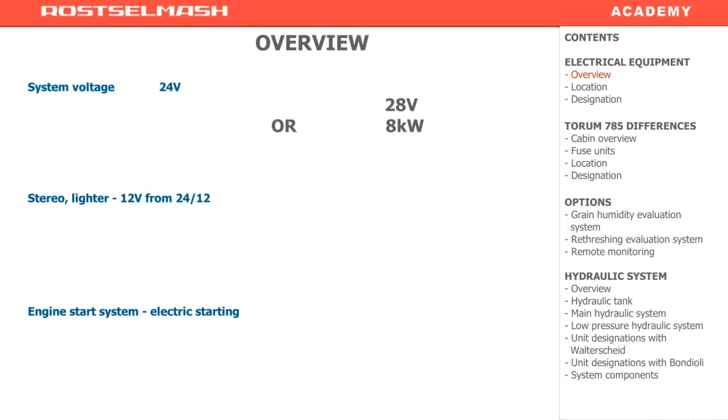Harvester electrical equipment. The voltage of the onboard circuit is 24 volts. It is achieved by installing two rechargeable batteries of 12 volts each, and due to serial connection, the voltage of the onboard circuit is 24 volts. There is also a generator. When the engine is running, it supplies power to the onboard circuit and also charges batteries.

When the engine is off, the power of both batteries is used. You may use the voltage of 12 volts on the harvester onboard circuit. For this purpose, a special 24 to 12 volts converter is installed. The startup system of the harvester is an electric starter one. Please observe the following safety measures when working with electrical equipment of the harvester.

The most important thing is not to disconnect the batteries when the engine is working. In this case, when the batteries are disconnected, the impulses will come from the generator. Such negligence may lead to power surges that will damage the electrical equipment.

Next, before welding, first remove the plus terminal. The right thing to do would be to remove both terminals, plus and minus, then apply both terminals together. Both batteries are disconnected. A really important thing here is to put the engine switch into the on position. When it's switched off, the circuit is broken.

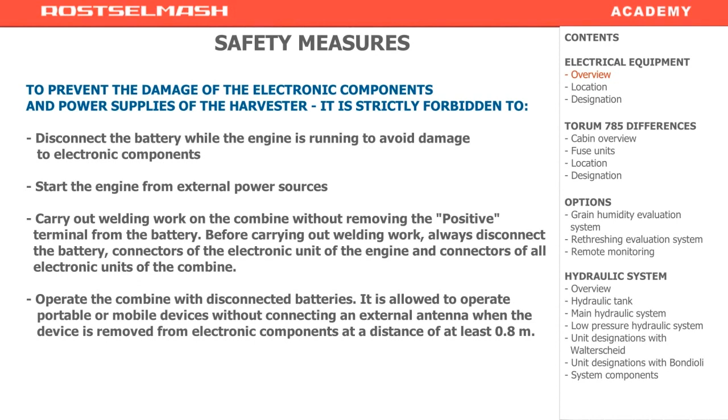Another important moment when welding. Place the ground in the vicinity of the welding spot. Otherwise, the welding process will create impulses that will make a negative impact on the harvester electronics.

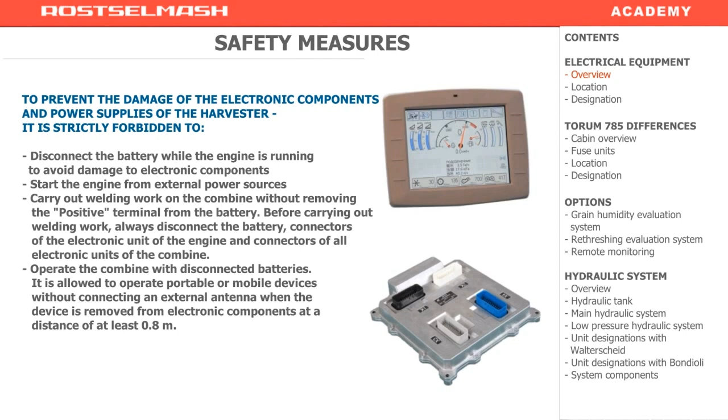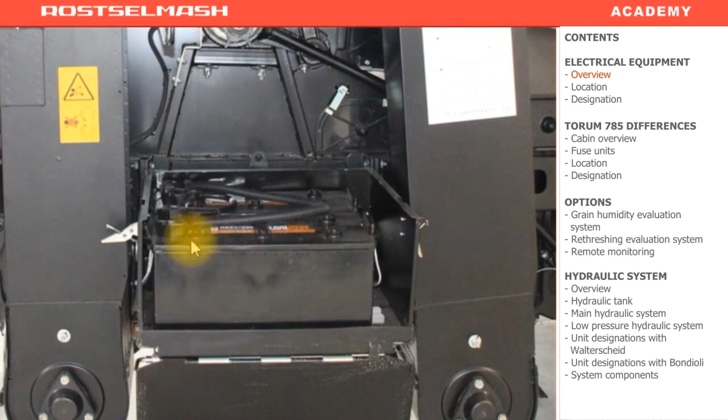The batteries are located on the right side of the harvester in the special battery box. As has been mentioned before, there are two of them. Below, under the lid, there is a power switch. It switches off the plus terminal. Some people call it a ground switch, but it would be wrong to call it this way. These days, the ground is screwed directly to the body of the harvester, and the plus terminal is disabled with a power switch.

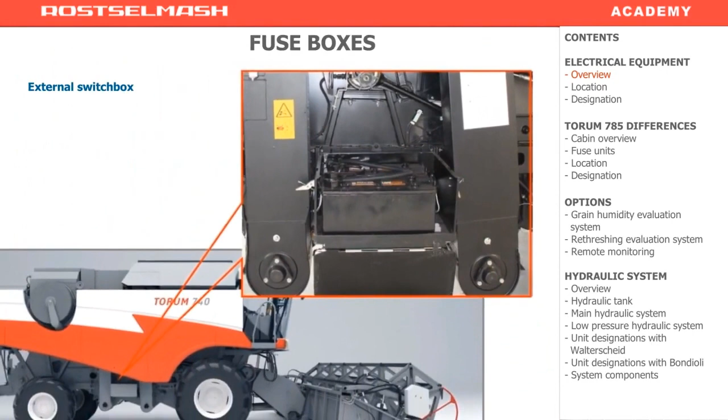Under the battery box, there are three power fuses. 30 amperes is the power supply to the engine control unit. 80 amperes is the onboard circuit power supply. If one of the fuses blows, half of the combine is de-energized. If both of them blow, the whole combine is de-energized. From those fuses, the power comes via thick wires, which go into the external switch box on the right.

Here you can see two power blocks. Each of them contains two fuses. The fuses on the top are 60 amperes. The ones at the bottom are 30 amperes. Above the power blocks, there are two conventional fuse boxes, FU7, FU6, where the fuses of consuming units are located. Vertically positioned fuses are the spare ones. You use them to change the blown fuses.

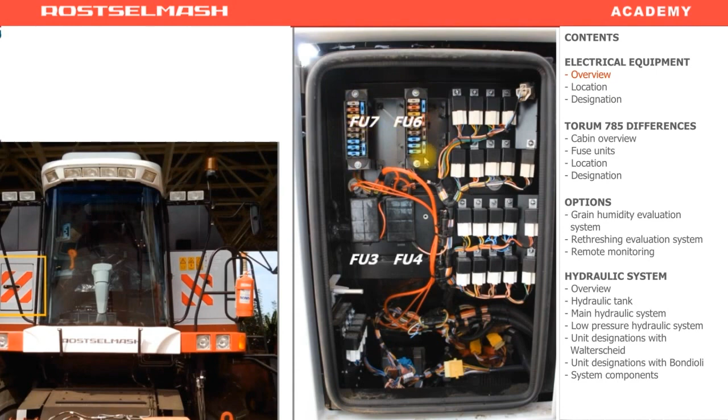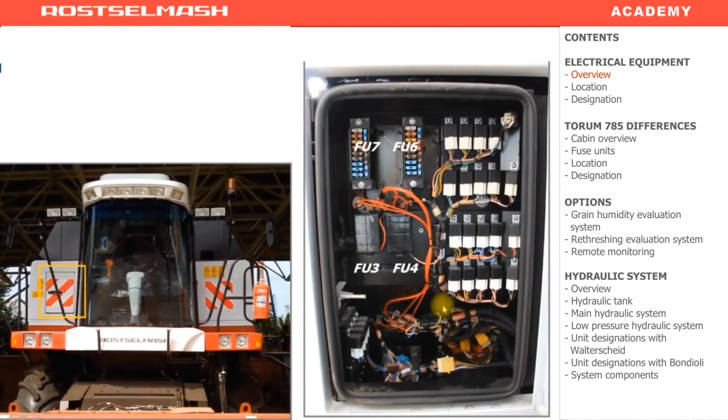Also, this box contains a pretty big amount of relays. It also contains various electrical wiring, harnesses, and connectors. Then there is a small cabin switch box. It is located on the right. If you open the right door, unscrew the iron shield, and dismantle it, you will see two small rows of relays.

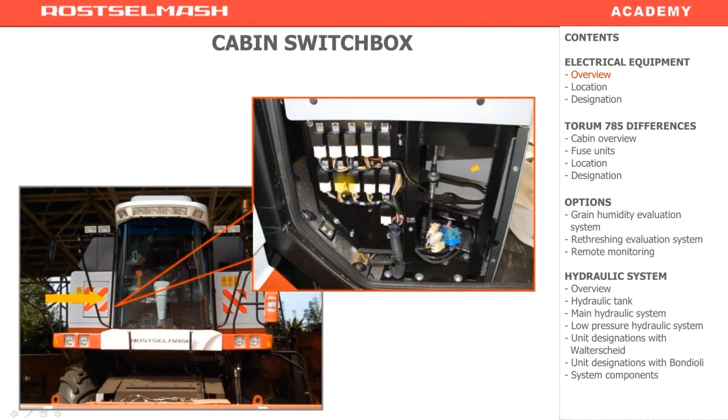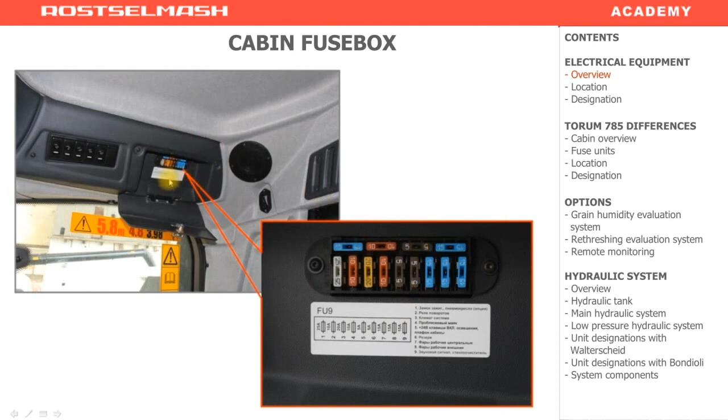Another fuse box is located in the cabin at the top. On the right you will also see the designations of the fuses. The designations of other fuses and relays can be found on the door of the switch box inside.

It is prohibited to use fuses with a value higher than installed here. If a 5 ampere fuse blows, it is prohibited to replace it with a 10 or 15 ampere fuse. An even worse solution would be to use copper wire coils or a coin or a paper clip instead.

Monitoring and control system has a display, a control panel, and all the other electronic units installed on the machine: a display, a control panel, 2 chassis modules, and a field copying system module.

There is also a joystick and a CAN bus, which controls the combine. We see the orange lines, which connect the electronics of the harvester with the electronic units of the engine.

The engine has 2 units of its own, produced by Mercedes. One of them is located on the engine, and the other one is located in the cab.

The units are interconnected with a CAN bus, and to control the engine and read its parameters, there is another bus between the chassis module and the engine control unit ADM2.

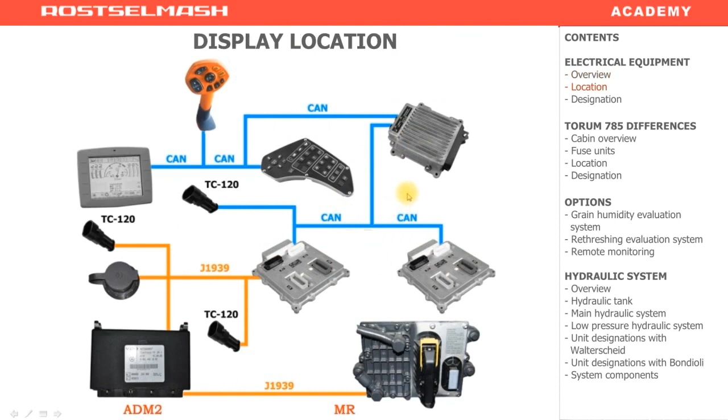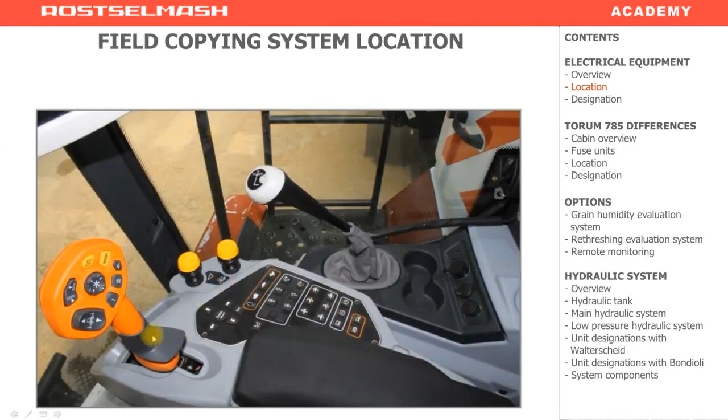The display is located inside the cab, on the front stand. The joystick and the control panel are located in the armrest. Under the cab, there is a field copying system unit.

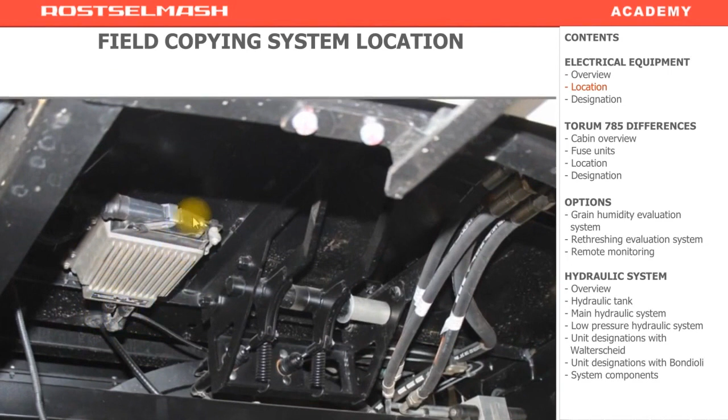Here you can see the 2 round connectors of the CAN bus, and also the 55-pin connector for inputs, outputs, sensors, coil control, and so on.

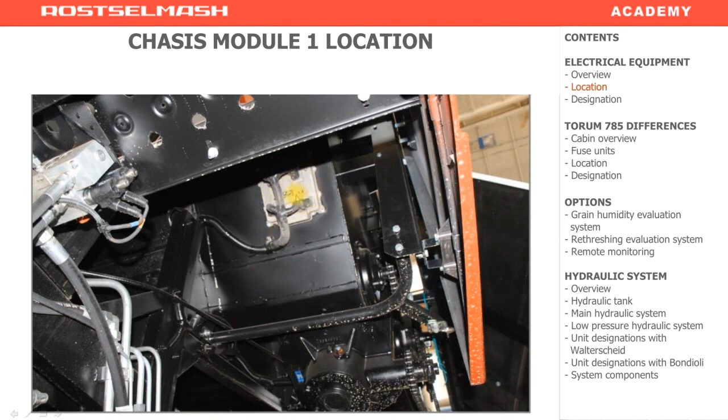The first chassis module is located on the left wall of the grain tank. Below, we have the left front wheel, and if you look up, you will see the chassis module.

The second chassis module is located on the rear wall of the grain tank, on the side of the motor unit. Here we also see TC-120, which is attached with a harness.

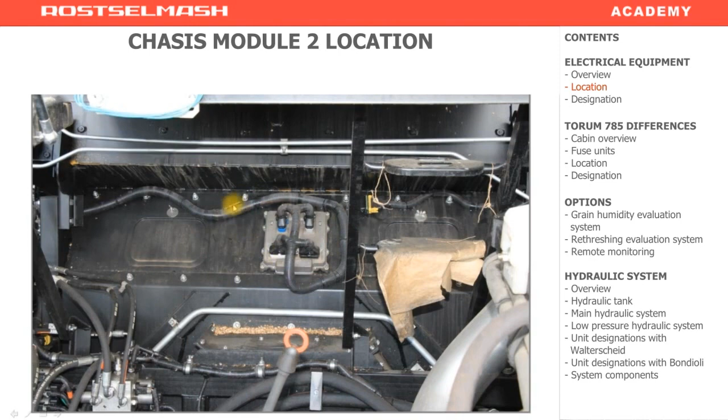The ADM2 unit is located in the cab. If you open this door by unscrewing 2 bolts...

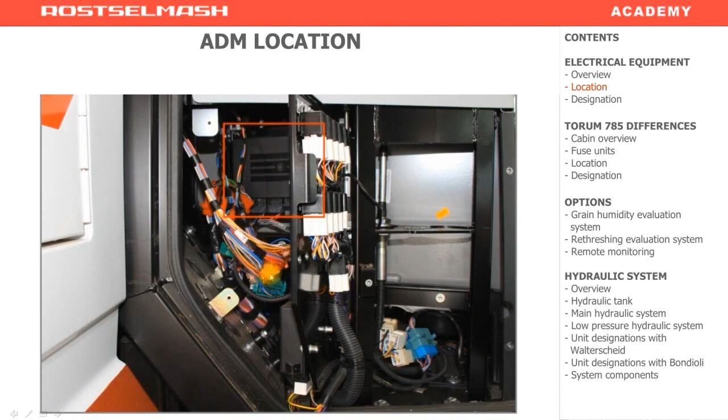...you will see the engine control module and other electrical connectors, for example harnesses and inputs. Here, swivel lights relays can be found.

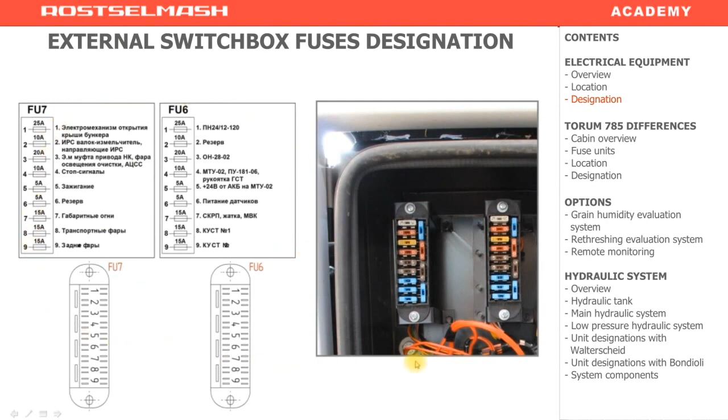For the purpose of making handouts, in this manual you will see the fuses diagram. Here you will find the designation of the fuses and switchbox relays, which can be used for searching and eliminating failures.

The differences of Torum 785: engine start blocking. Instead of blocking based on the neutral gearbox stage, here the engine start is blocked based on the neutral position of the joystick. If the joystick is not in the neutral position, the engine start is blocked.

The second blocking type is similar. The engine cannot be started repeatedly when it's already working. This prevents starter breakdown when the engine is working.

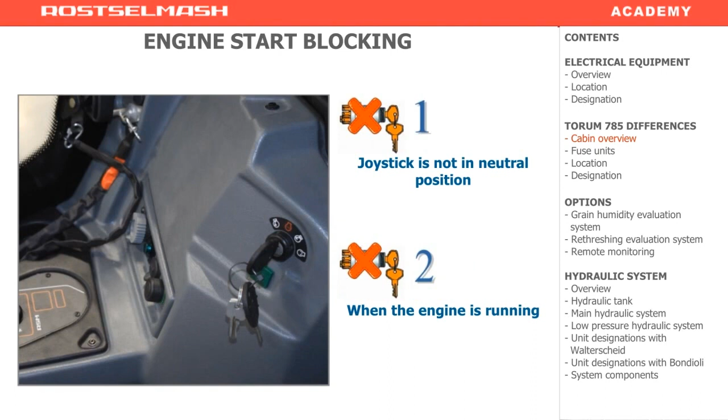The lighting here is similar: clearance lighting, indicators on the steering column. Headlights on the front bumper and on the rear bumper are different.

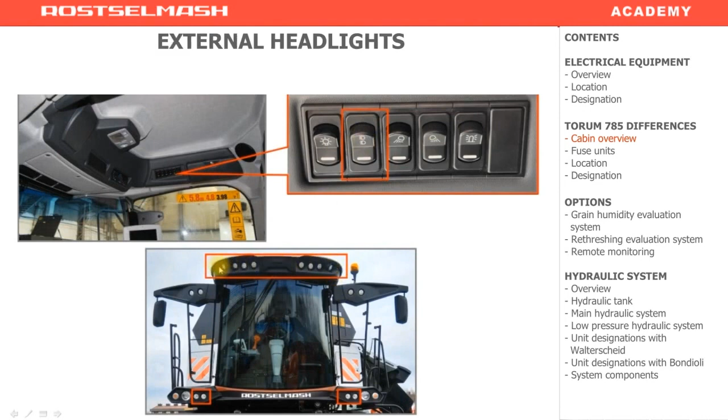The transport lighting is switched on if the clearance lighting is on. The next button switches on the central working lights, and on this model there is a bigger quantity of lights. Here you can see 8 working lights, external working lights, 2 on the left, 2 on the right.

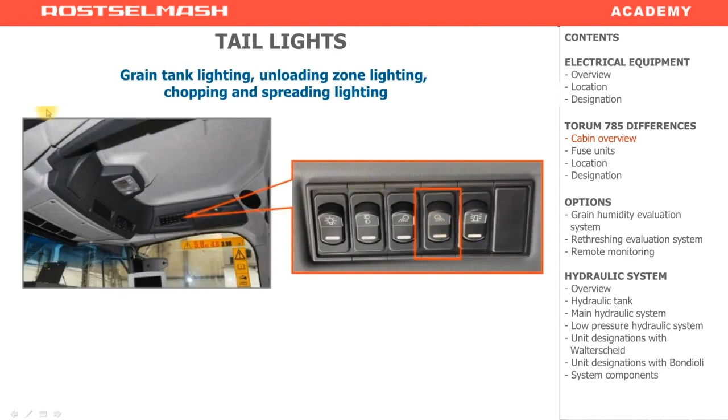The rear working lights are used for lighting the grain tank and chopping and spreading system: chopping and spreading lights, grain tank lights, and unloading zone lights.

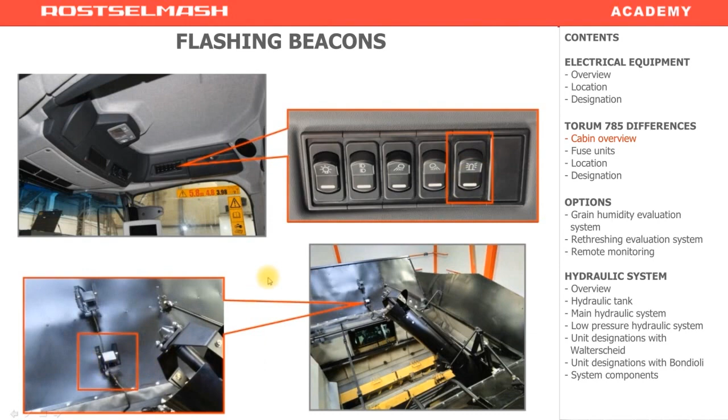Flashing beacons are identical here. You can switch the beacon on manually from the cabin using this button, and when the grain tank is 75% full, it is switched on automatically. One flashing beacon is located at the front of the harvester, and the other one is at the back.

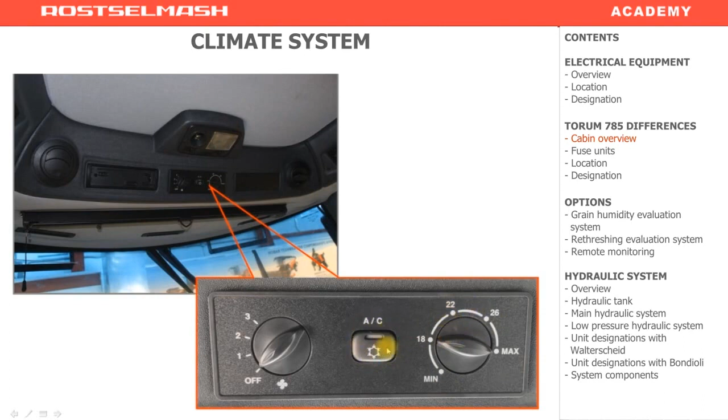The temperature indicator is located behind the driver, near the ceiling.

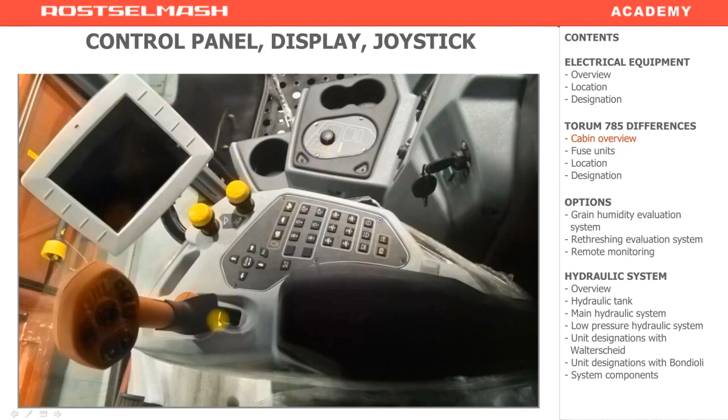The control panel is similar. The display is identical as well, but it is located on the armrest. The joystick is similar, but here we see the panel with the gearbox ranges switch.

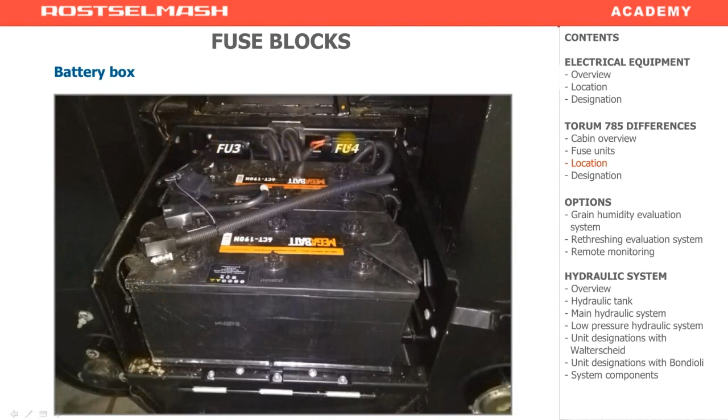The difference in the electric equipment is the following: the power fuses are located not under the battery box, but inside of it — 30 amperes and 2 of them 80 amperes, the same as on Torum 750 and 780.

The external switch box is located in the same place, but the internal distribution of the components and their location are different now. For example, we have got 4 such units. The values of each fuse are shown on a laminated sticker inside the switch box.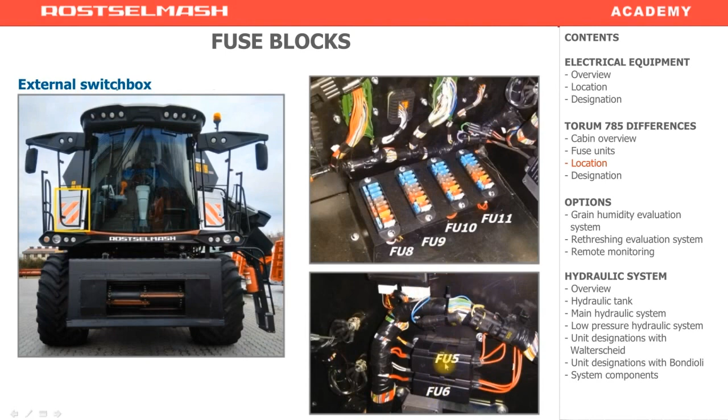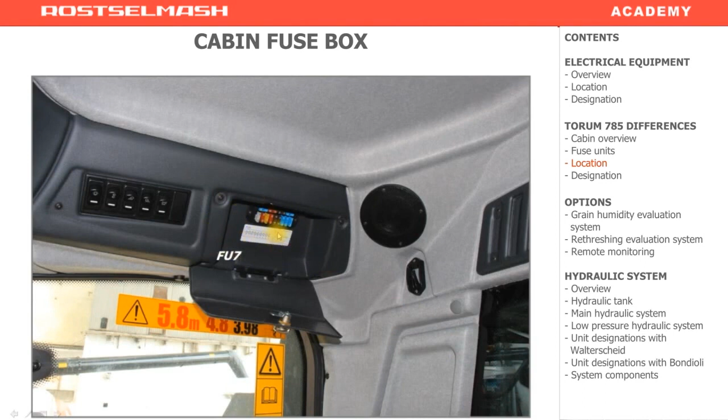There are 2 power fuses, FU5 and FU6. One more fuses unit is located inside the cab. You can find it in the same place. There is also a laminated sticker with fuse designations, which also contains their nominal values.

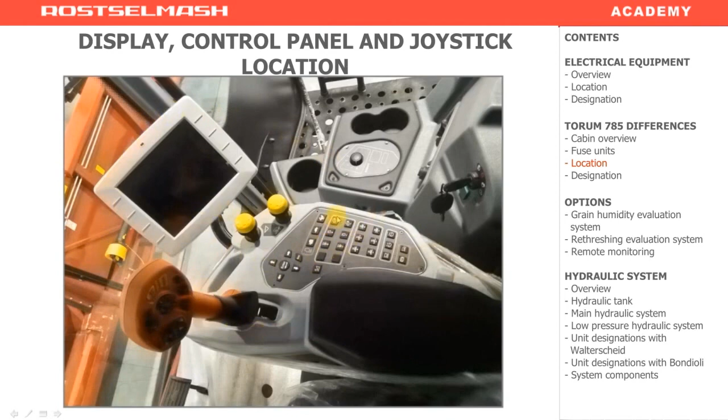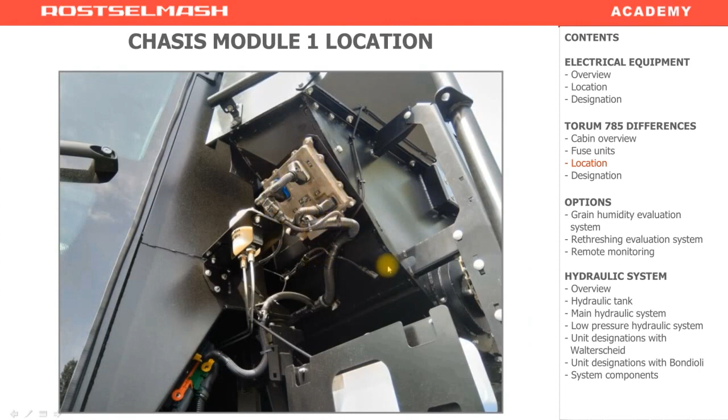As mentioned before, the display is located on the armrest. The control panel and the joystick are also here. The field copying system is under the cab in the same place. The chassis module number 1 is also located on the front wall. The chassis module number 2 is also located on the rear wall of the grain tank, but at the top, not at the bottom, as on Torum 750 and 780.

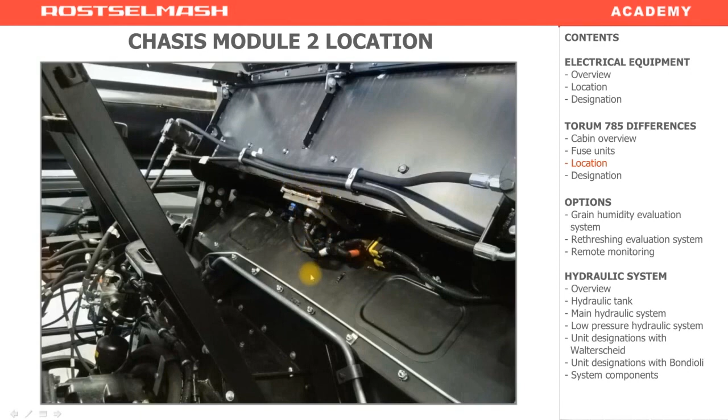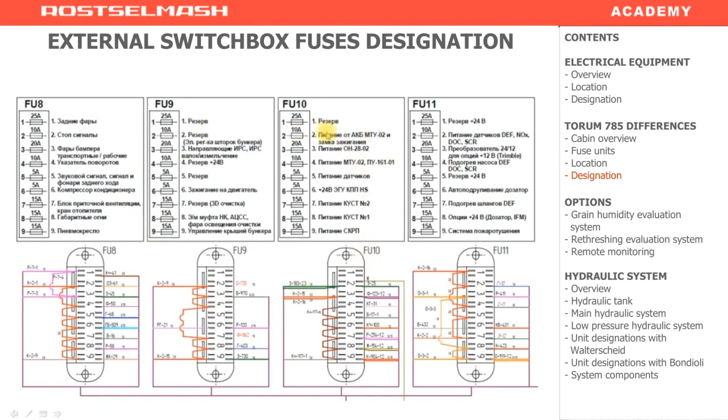For your convenience, in the handouts you'll find the values and designations of the relays and fuses located in the external switch box.

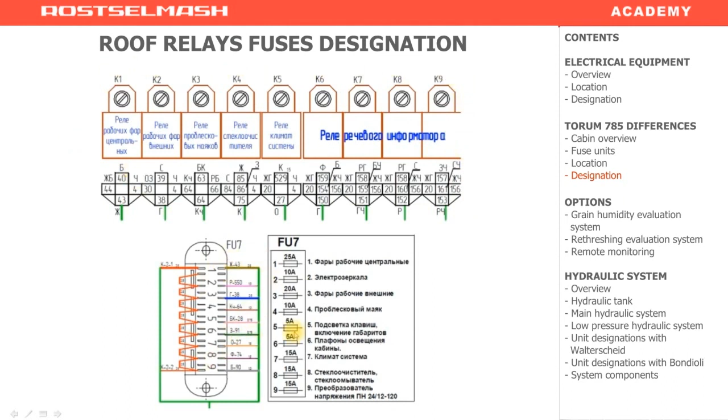This modification has got additional relays located in the roof. To access them, you have to unscrew the panel with the fuses unit, and there you can find the relays.

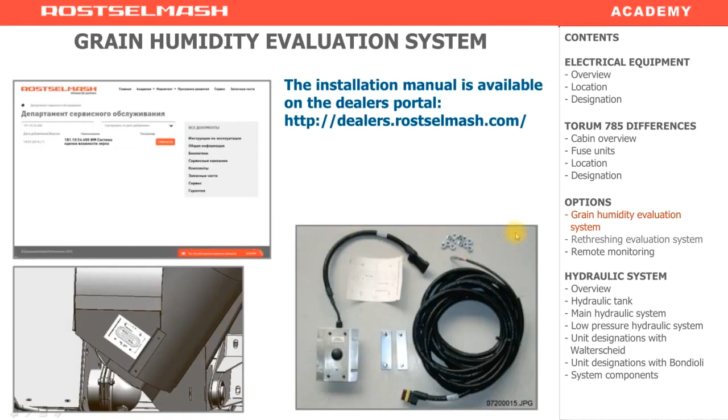Additional options: the grain humidity evaluation system. This kit can be installed as an option after you buy the harvester, so there is a possibility not to order it directly from the plant.

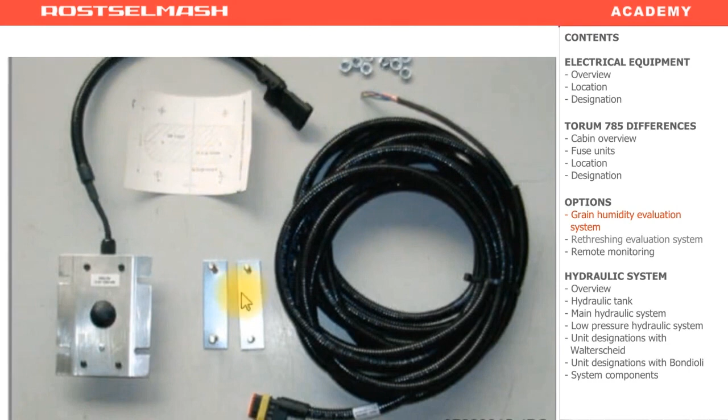We can also call it the packaged option. The parts kit contains the sensor, a cable, the sensor fitting, and an installation diagram, which is actually a sticker at the bottom of the feed auger, showing this as the place for fitting the sensor. In this spot, you cut a hole to place the sensor inside the grain tank. Install the sensor here and then calibrate and adjust it.

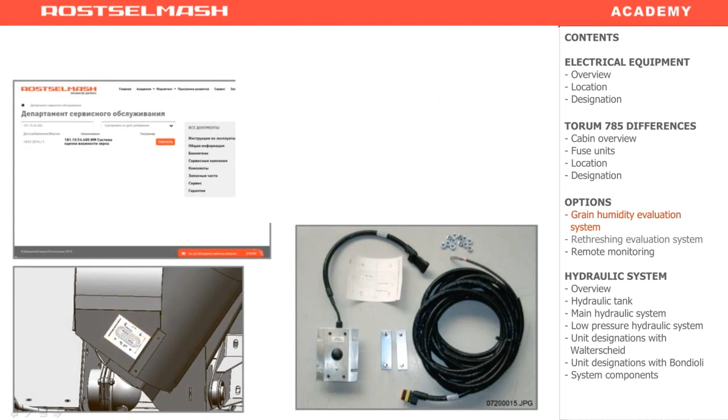The installation instructions manual can be found on a special dealer's portal, which each dealership member must have access to. As a result, on the display you will see not only the humidity level of the grain, but also its temperature.

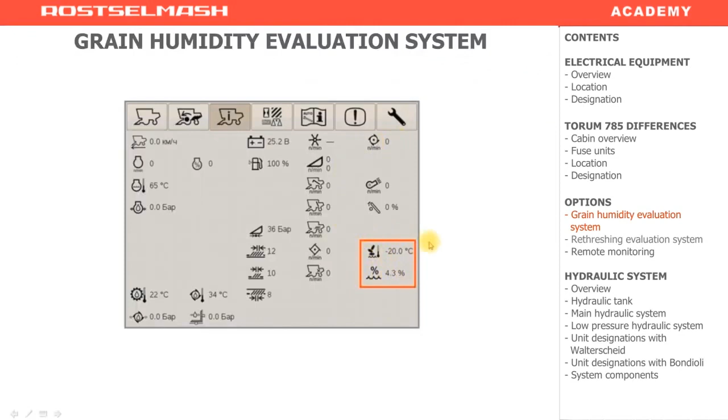The rethreshing evaluation system's installation manual is also found on the dealership portal. It is also a package solution, so it can be installed on a harvester after you buy it. It is installed here and has the form of optical sensors.

You have to store the 0 value, which indicates the absence of grain in the rethresher. This option also allows us to adjust the cleaning system of the combine more precisely. Based on the rethresher load, you can identify...

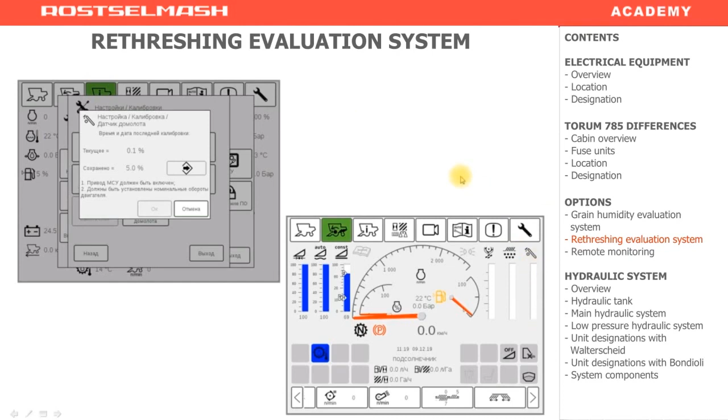On the display, you can see the third column, which is filled in a similar way as the columns showing losses. It is filled depending on the load of the tailings auger.

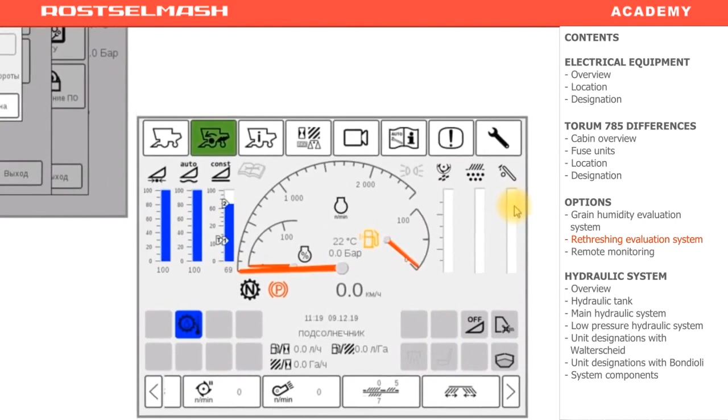Remote monitoring is the option which all Torum's models are equipped with. For this, you install the antenna, GPS and GSM modules, and connect them with cables. On the side of the module, there are slots for an SD card and a SIM card.

The SIM card is necessary for data transfer, and the SD card is necessary for storing data when there is no satellite connection. The antenna, the SD card and the SIM card must be sealed. For this, the kit contains special sealing stickers. After this, you have to transfer the number and the system number of the device, which is used for remote monitoring. This data is transferred to the plant.

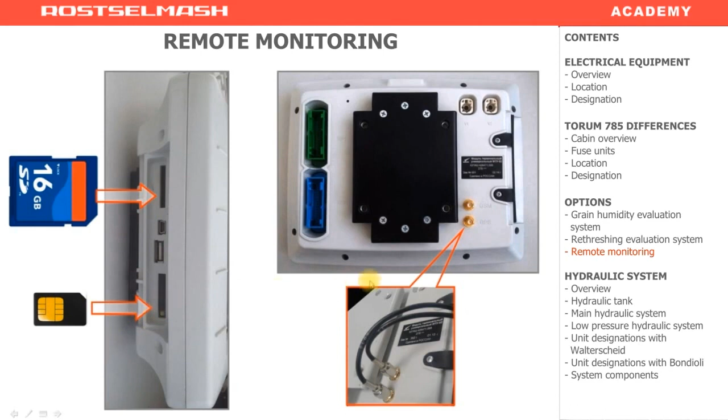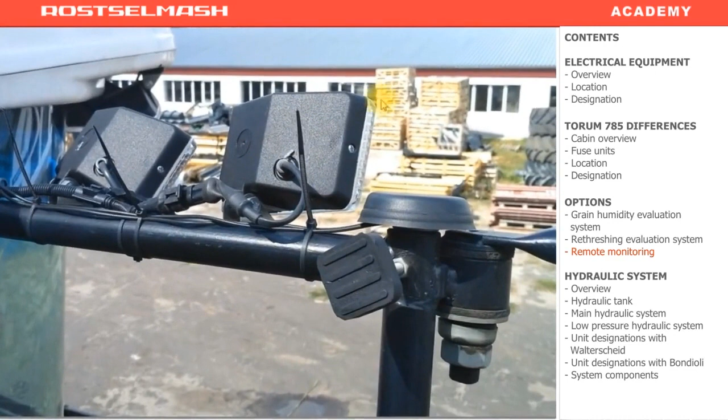As an example, you see the antenna installed on the Torum. You install it on the right, on the frame for the fitting mirrors. This type of antenna installation is correct.

If you install the antenna yourself, never put the cables inside through the weather strip. Do not press the cables with the weather strip, and do not coil the rest of the cable on the holder. You can put the cables inside through the special holes in the roof, and then connect them to the display.

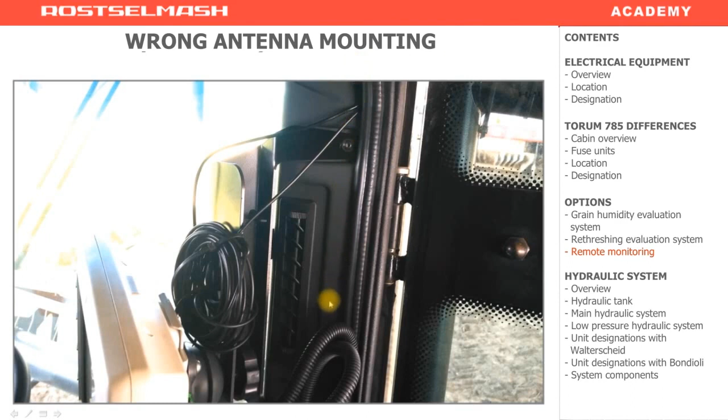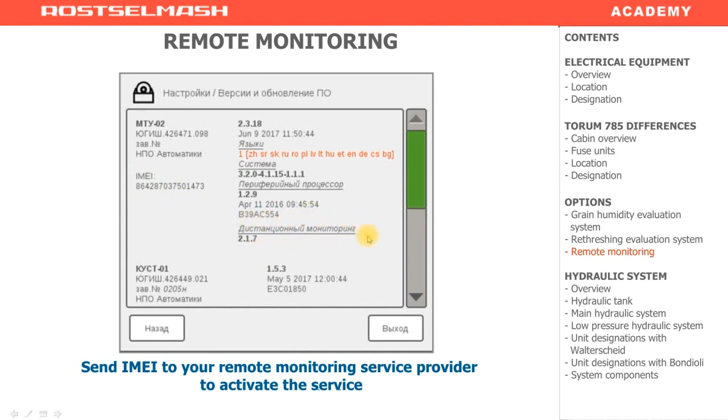The last additional option is actually an additional function to the previous option. This additional function allows you not only to see the location of the harvester, but also monitor its fuel level. You can control the fuel consumption, the number of tank refills, and other parameters, and you can see all of that in the form of graphs.

For this you install the sensor Escort TD500. It is calibrated to the tank volume. A special user manual is available for this calibration. After calibrating, you connect it to the system, and from it there is a standard system indicator that shows how much fuel you've got in the tank right now.

This data is transferred to the server, and the user is able to control it using his mobile device, a laptop or a desktop.

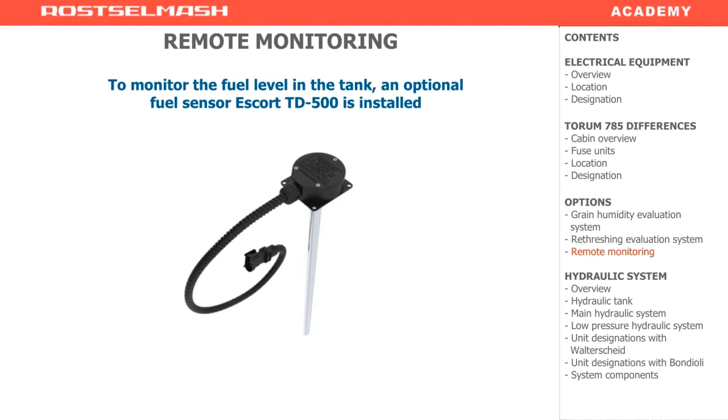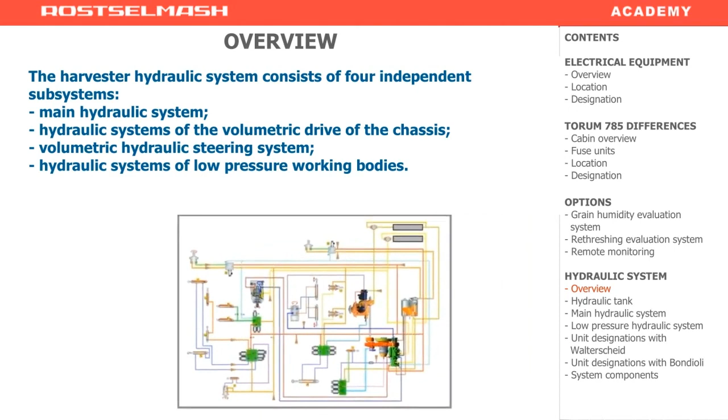Here are the main specifications. The oil type has been mentioned in the maintenance videos. The volume is 133 liters, including the hydro tank, which is 50 liters.

The main pressure specifications: the main hydro system is 160 bar, low pressure system is 28 bar, and steering system is 160. In the drive axle hydro system it's 420, and rotor drive 420. Hydrostatic transmission produced by Sauer Danfoss.

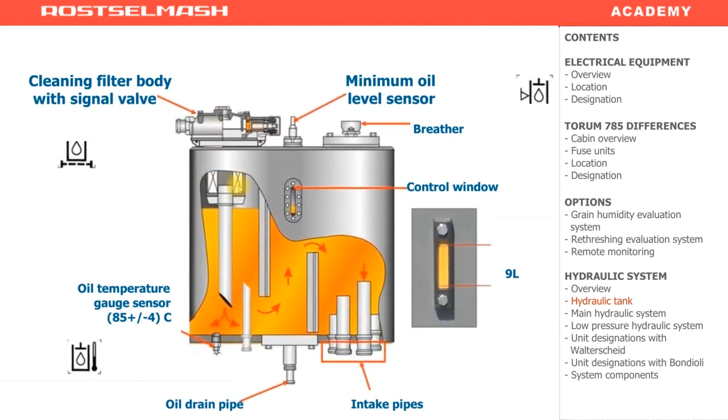Hydro tank and its components. In the top left part, there is a filter housing with a filtering element. It's the drainage line. All the drainage goes through the filtering element, and when it's cleaned, it goes into the tank. Here there's also a bypass valve.

It is equipped with a signaling sensor, which goes off in case of filter clogging. This may happen in two cases: when the filter is actually clogged, or when the oil is not heated enough. It has a high viscosity level, and it bypasses the oil filter.

Then there's the minimum oil level sensor. It notifies the driver that the oil level in the tank is low. On the right there is a breather that provides the atmosphere connection, and an inspection window that helps us control the current level of oil.

Below you can see oil intake tubes. Using special hoses, you connect the pumps, and this way the oil is pumped out of the hydro tank. On the lowest level, there is an oil intake for the steering hydro system. It is located below, because the steering hydro system is considered the most important one in the harvester.

In the middle, there is an oil drain hose. It's got a special pipe that goes to a valve, used for changing oil. Below, there is an emergency oil temperature sensor in the hydro tank. Inside the tank, we have special plates, installed to prevent oil foaming.

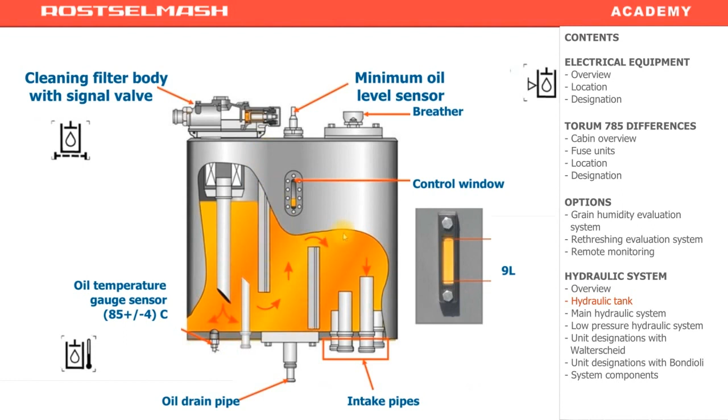The main hydraulic system contains the axial piston pump, located on the engine power reduction gear. You can see it in the first position on the left side of the harvester.

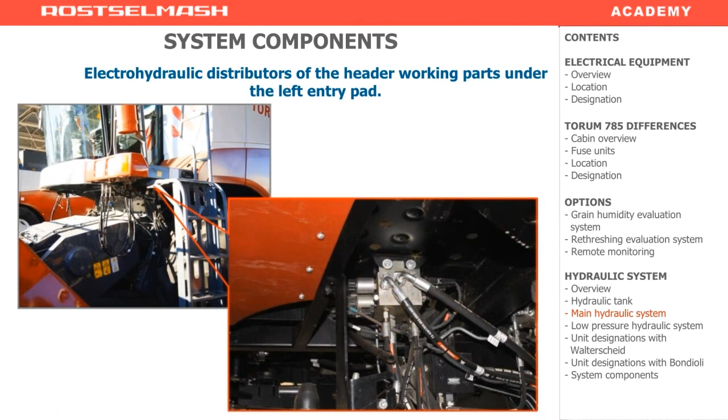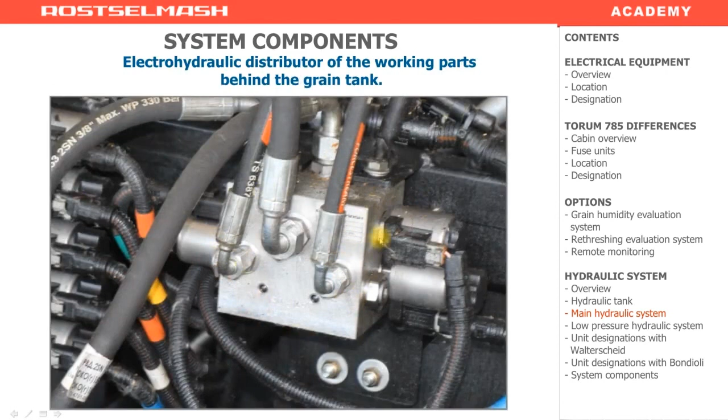The next hydro unit is located behind the grain tank on the left. You can see that on the side of the motor unit, it has 3 sections. It has functions such as folding and unfolding of the auger and activation of the vibration agitator.

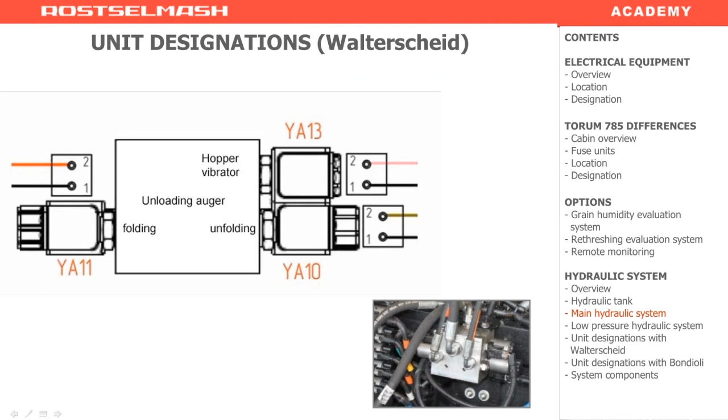If you have bought the harvester with Bondioli, the distributor will have 4 sections. It will contain an additional section for the emergency rotor start, which provides special control of the rotor drive hydro cylinders.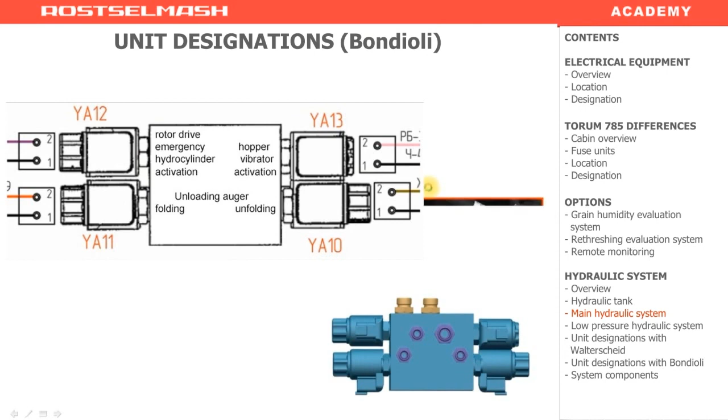The next hydro unit, located almost at the same place but on the left, under the entry platform, is responsible for the reel rotation speed.

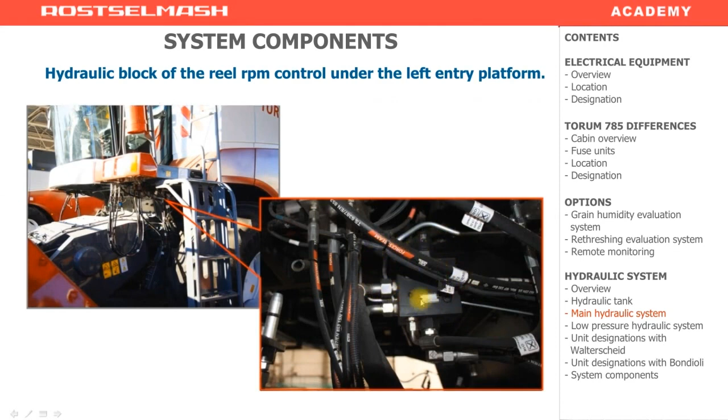The next hydro unit controls the fan RPM. The unit is located near the right front wheel. Here you see the hydro unit itself and the hydro motor. Its distinct feature is the presence of a manual adjustment tool that uses an electric magnet.

In case of coil failure, because of a short circuit, cable break, or any other problem, you can use the manual adjustment option.

The manual adjustment is done using this small handle. Pay close attention: as soon as you start turning this handle, the fan will rotate as well, and the rotation will happen no matter if the thresher is on or not.

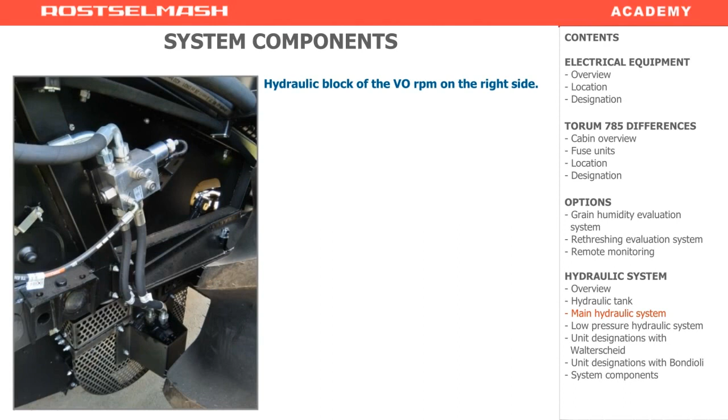The next hydro unit is located on the left, at the end of the platform. This hydro unit is responsible for raising and lowering the header, and also the LS valve. Here you see the LS valve, and here 2 valves for raising and lowering.

This handle must be turned all the way out, or counterclockwise, before calibrating the field copying system. To do this, unscrew the lock nut, screw the handle all the way out, and then fix it with the lock nut until hard stop.

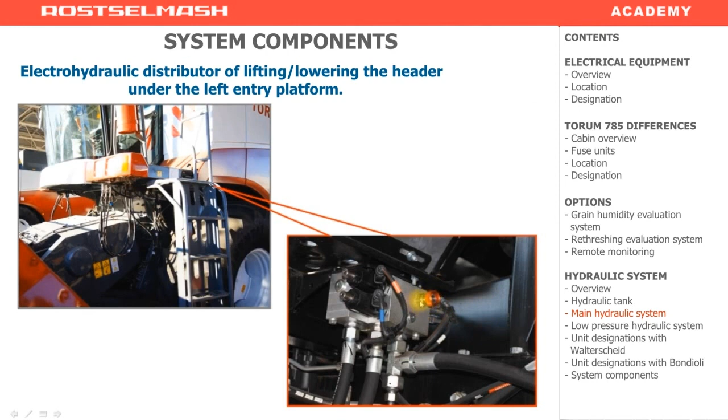Then goes the undercarriage hydraulic system. It contains the pump on the power reduction gear, and a hydro motor located on the gearbox.

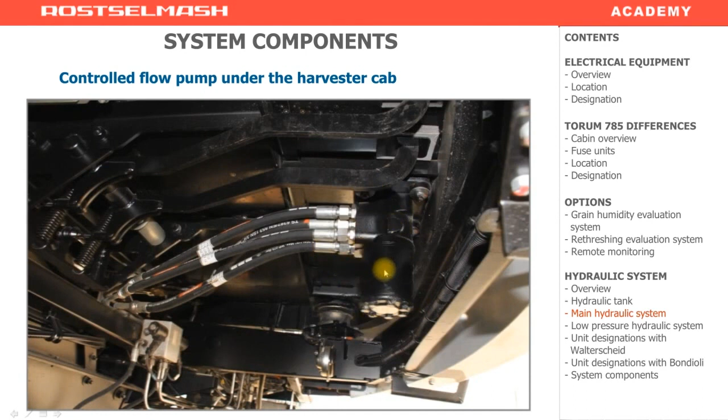The steering hydraulic system includes the flow pump. You can find it under the cab, and it is connected to the steering column, along with 2 rotary gear pumps installed on the power reduction gear on the side of the motor unit.

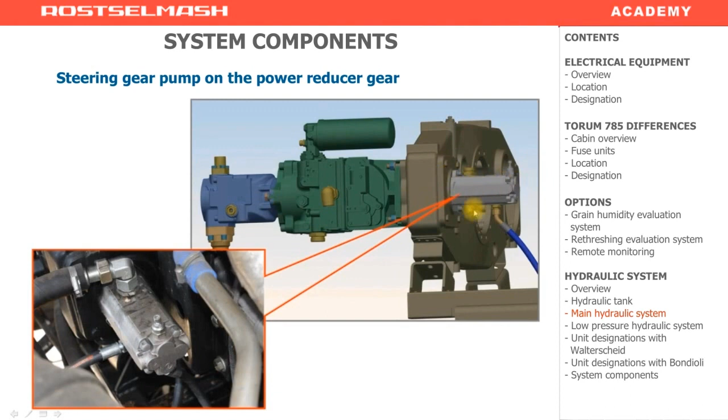The low pressure hydraulic system contains a similar pump, because the replenishment pump used in it is part of the hydrostatic transmission pump. That's why you see this pump and the 5-section distributor.

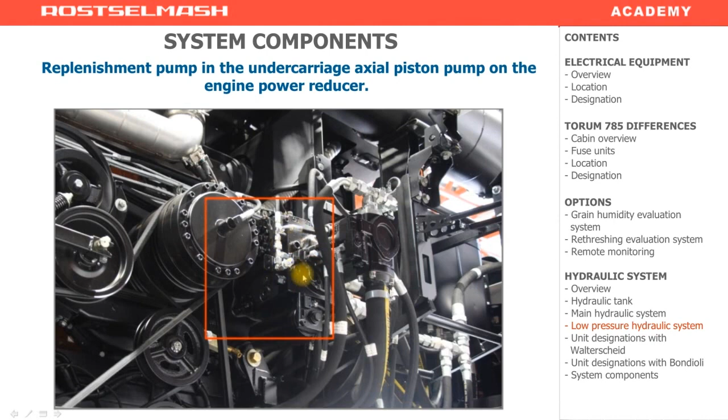It is located behind the grain tank on the left of the rotor reduction gear, not far from the main hydro system distributor.

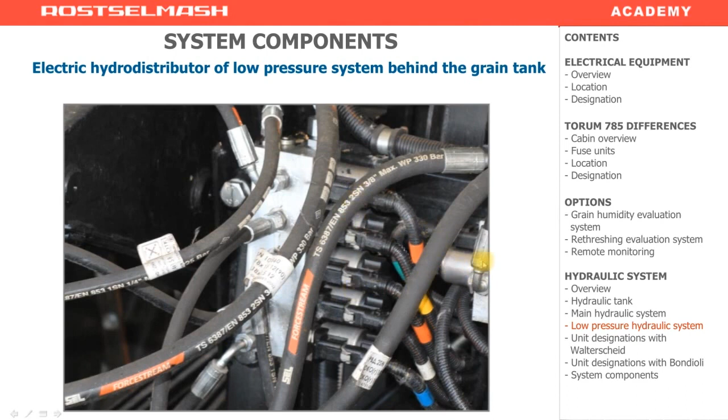The unit has got 5 sections. The first one activates the unloading, the other 2 switch between the ranges, and the other 2 are for cleaning drive coupling activation and rotor drive coupling activation.

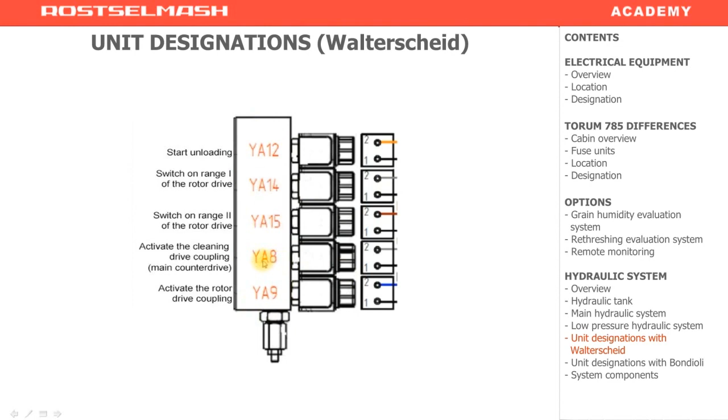Torum 785 has got 6 sections. There is one more section below which activates the hydro coupling of the feeder house, because this harvester has got not an electric, but a hydro coupling.

In the bottom part of the distributor, there is a rubber cap. It is located on the distributors with 5 or 6 sections. In fact, it is a button that you can press to release the residues of the pressure.

Because the low pressure hydraulic system has got a hydro battery, if you have recently switched on the harvester, the hydro battery remains charged for a long time. So before conducting any manipulations in the hydraulic system, press this button and hold for a second or 2 to release the pressure.

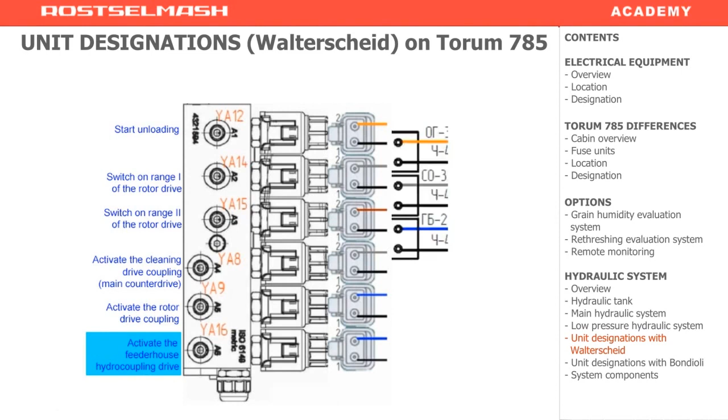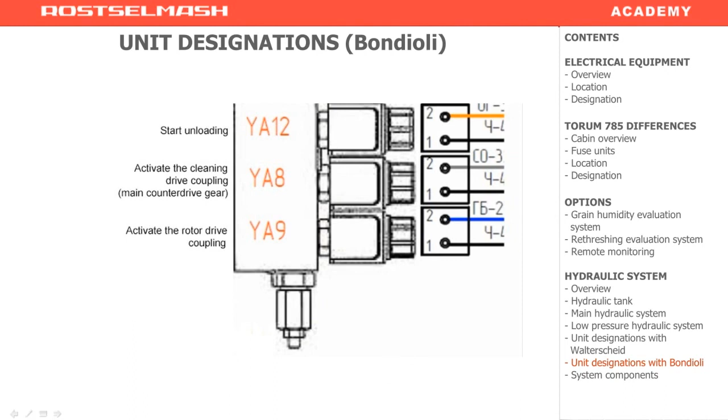If you have bought the harvester with a Bondioli reduction gear, you will find there a 3-section distributor, because this reduction gear does not have a range selector. So this means minus 2 sections. The rest of the sections are similar: unloading activation, the main counter drive, and rotor drive coupling activation.

The low pressure hydraulic system has got one more component: the parking brake control.